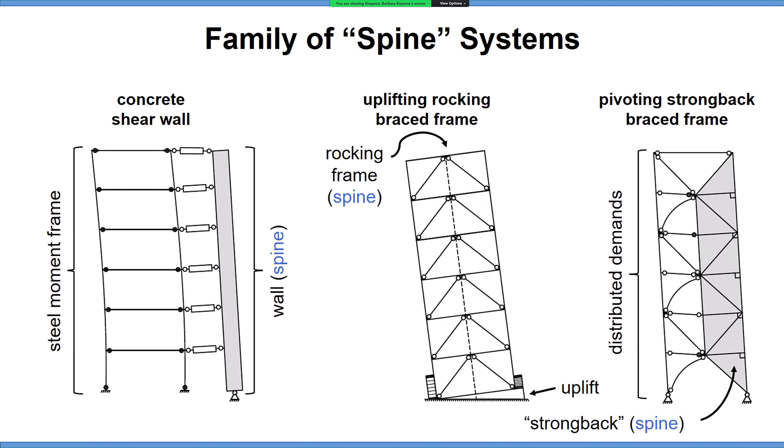From that perspective, many of these systems have similar behavioral characteristics. I'm going to focus on the one on the right, but keep in mind it's really a family of these spine-like systems, and a number of researchers have looked at other variations of this concept.

When I initially was putting together this presentation, I thought it would be easiest to go through the many projects that have been funded so far, looking at this Strongback spine concept. There's been a number of collaborators along the way, and I by no means want to focus just on the work that I've contributed to the system. I'm just going to put it in the broader context of the earthquake engineering community.

In 2013, there was a grant looking at the behavior of older or vintage brace frames, and that stemmed into the idea of this Strongback or spine concept. What we were seeing, and what has been documented after a number of previous seismic events, is that brace frames tend to concentrate damage in a few or single stories.

By doing that, you provide an explicit elastic load path where you can distribute the demands across multiple stories. So how I like to describe it is that in a conventional system, where you have concentrations of demand in a single story, it's really 100% of the damage in one story.

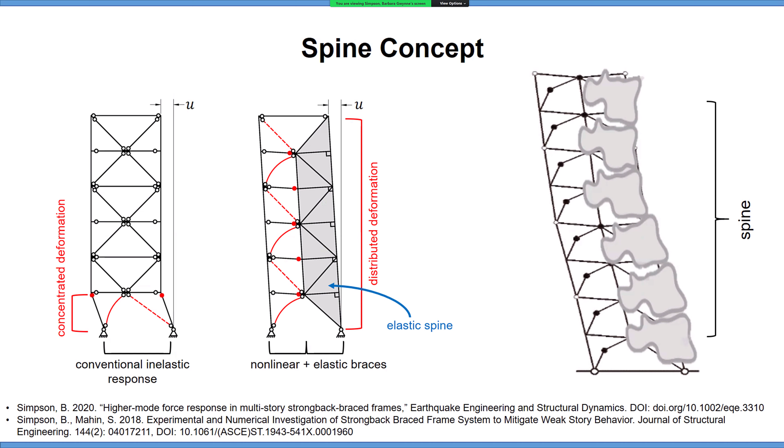This is another figure I often use: in employing one of these Strongback spines, you can vertically propagate demands, and because of that, you get increased design flexibility. So you can avoid mass irregularities and stiffness irregularities by spanning across those stories with the Strongback system.

If a brace were to fail—let's say by fracture or some rupture of the steel core of a buckling restrained brace—you can still span across that story, provided you have a Strongback that's stiff and strong enough to remain elastic when that occurs. So it really does give the engineer more design flexibility.

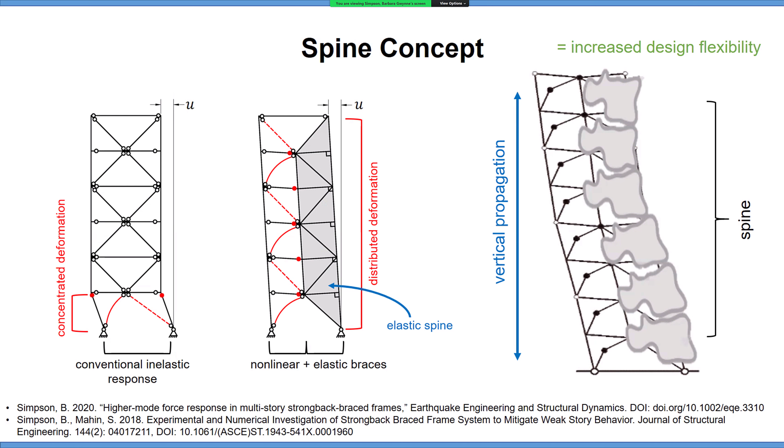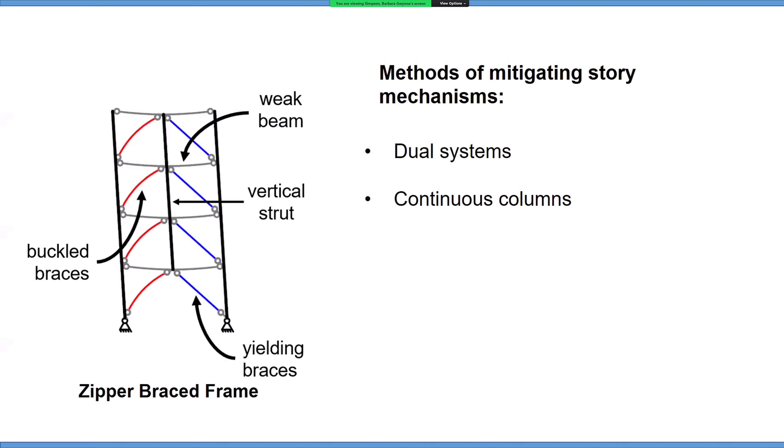I already mentioned the shear wall concept, rocking and self-centering systems, and again the zipper frame on the left. The Strongback is another variation of that theme, except that it's really the design of a very stiff and strong elastic steel truss that's embedded.

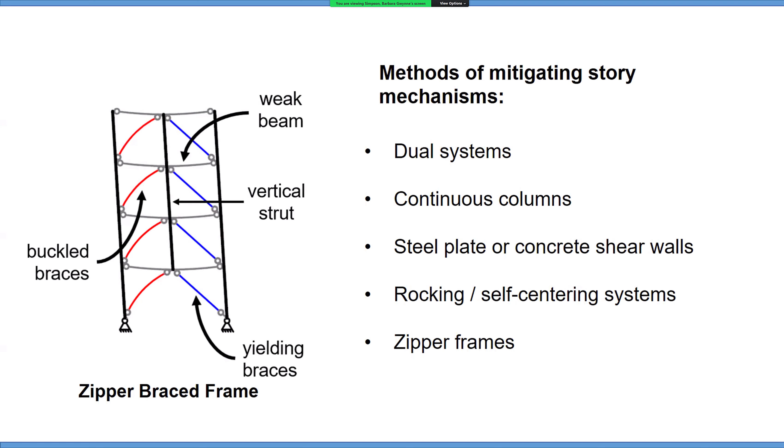Typically it's shown within the same bay as your brace frame system, but it could also be in an adjacent bay, or even separate out entirely. What it does, by having an elastic portion of your system that's designed to remain elastic, is that when you start looking at the kinematic or plastic mechanism of having that elastic portion...

...you get this pivoting type response, where a portion of this triangular part of the system, which is designed to remain elastic, pivots back and forth about a pinned base, or we've also looked at a weak axis column base.

This was one of the first experiments that I did on the system. It was a 2-story brace frame with a buckling restrained brace as the primary energy dissipating mechanism, and then it used the beam with flexural yielding as a secondary energy dissipation mechanism.

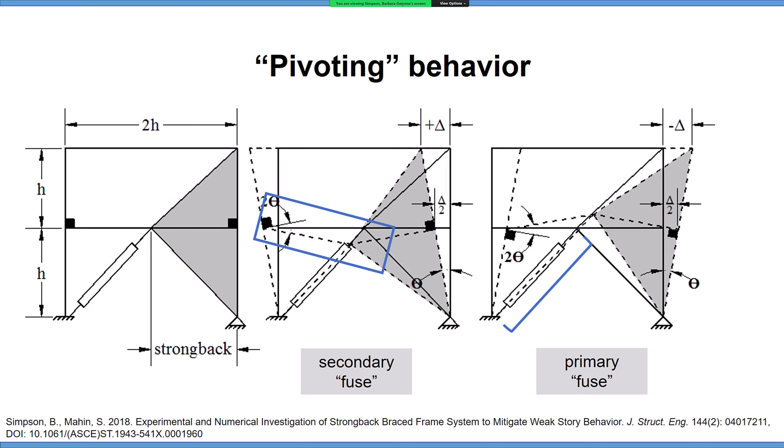This was the experimental test that I conducted during my PhD, and here you can see the strongback portion of the system that was designed to remain elastic. This was the experiment, and we pretty much got that behavior, that pivoting back and forth behavior.

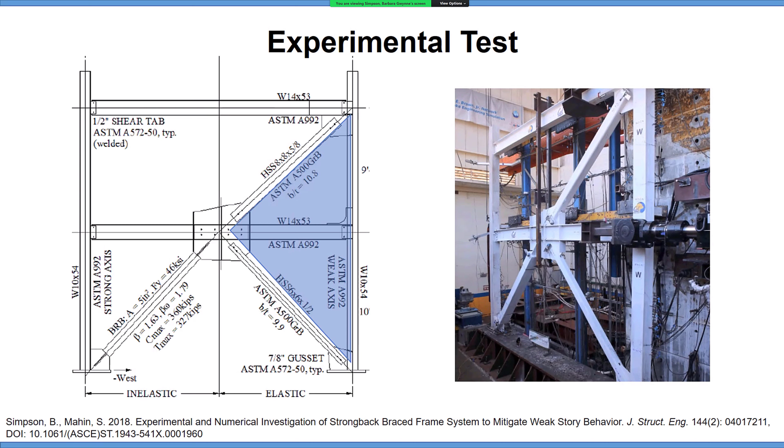Now the issue with this experiment is that it really didn't look at the dynamic response, and I'll have a couple slides just on how the dynamic response is very different than what you're seeing in this experiment, as well as that figure of the plastic mechanism.

This idea started catching on, and it was funded by AISC back in 2017, and it'll be funded again by AISC starting next year in 2022 to look at the system and how it can be incorporated into AISC's seismic design guidelines.

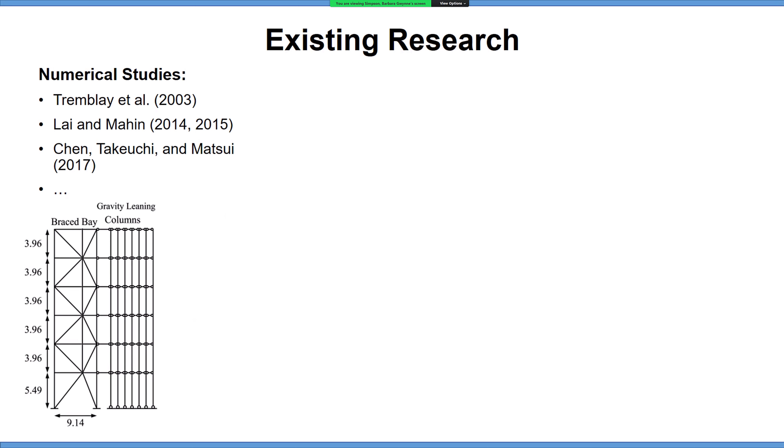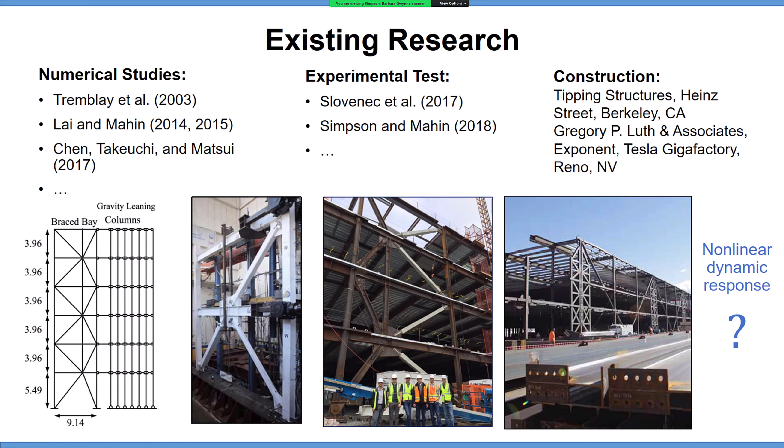The idea initially when it was funded in 2017 was that there were a number of numerical studies, this experimental test, as well as some work done by others, and it was started to be implemented as this very stiff and strong elastic truss in practice. But there wasn't really an idea of what this nonlinear dynamic response of these systems might look like and how you would adequately proportion this strongback truss to remain elastic. So this project sought to understand that a little bit better.

Here you have a first mode response where the force resultant of whatever those inertial loads are is maybe at this height h hat. You're forming some sort of plastic hinge at the base, I'm just calling that M1 star. And then just by equilibrium, if you take about the base, you can say that the base shear by some sort of capacity design is just going to be that moment divided by h hat.

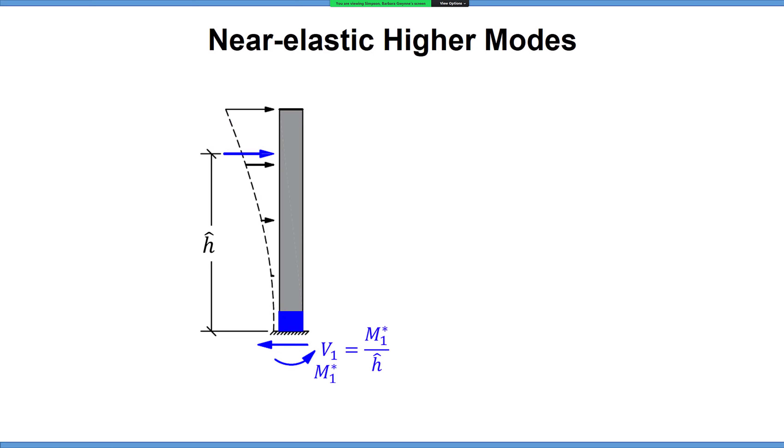Well, the issue is that's just accounting for the first mode of response. So as you account for higher modes, the force resultant wants to shift down. What you start seeing is that you're still constrained by the yielding at the base of the wall, so that's still M1 star in this case. But because now you're dividing by a smaller height of that force resultant, you can actually see larger base shears than you would just by the yield mechanism under the first mode.

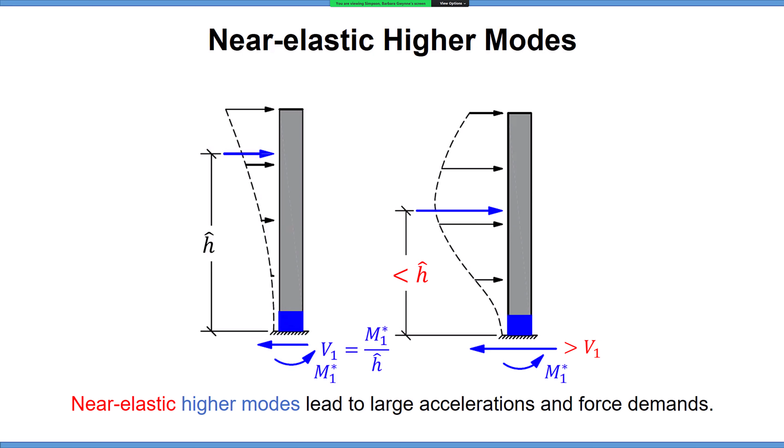I've been calling this the near elastic higher mode effect, and it can result in base shears, story shears, acceleration demands in the higher modes that are not necessarily limited by the yield mechanism of your system. Again, that's in the higher modes, not the first mode. So that results in some tricky design requirements to account for these higher mode force demands. And even worse, when you start looking at the higher modes, it's very ground motion dependent.

So now you're looking at what I'm calling near elastic higher modes—they are near the elastic response spectrum, and so it is highly ground motion dependent. It's not like you're constrained by yielding in the system; now you're actually dealing with elastic or near elastic response, and so it's extremely ground motion dependent.

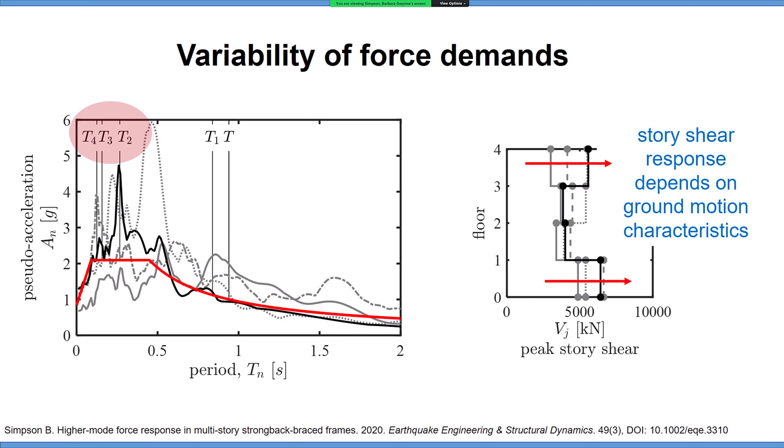So if you have ground motions that have higher mode frequency content, it's going to result in larger forces. And if you have ground motions with lower frequency content near your higher modes, it won't necessarily show this higher mode effect. But it is important, and it's something we need to design for in order for that strongback to remain strong enough and be a reliable system.

There's a number of different ways that people have sought to characterize this effect. I've looked at employing a modal pushover analysis, and the paper I wrote on that has been sent out. I can talk about that more if anybody's interested. It basically combines the response in multiple modes, though I should say it's not exactly theoretically accurate, so I can talk about that further too.

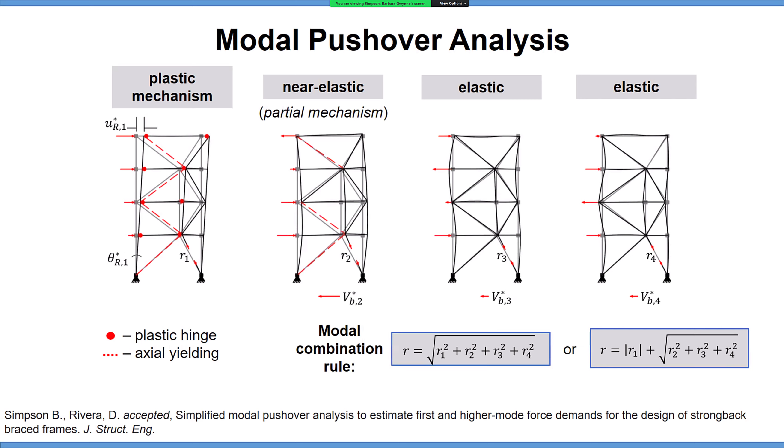There's also been a number of researchers who have proposed this modified response spectrum analysis, where you use a truncated response spectrum representing an elastic response spectrum in the higher modes, but then you reduce by 2/3 to get the design earthquake, and reduce by R to account for inelastic response in that first mode. So you could think of it as using an R equals 8 for a BRBF system in the first mode, and maybe an R equals 1 in the higher modes.

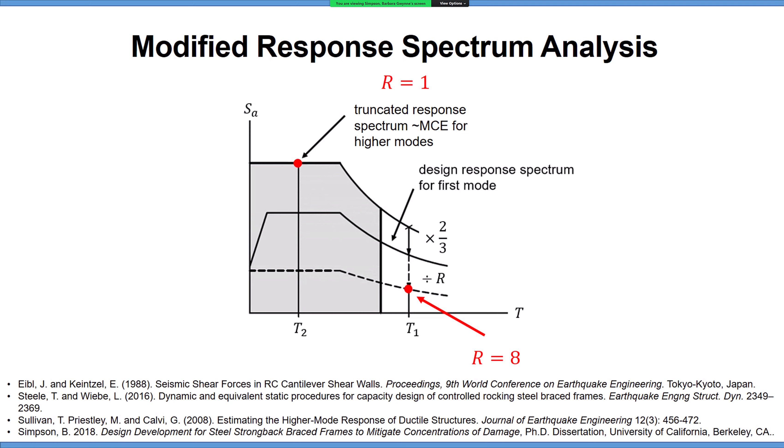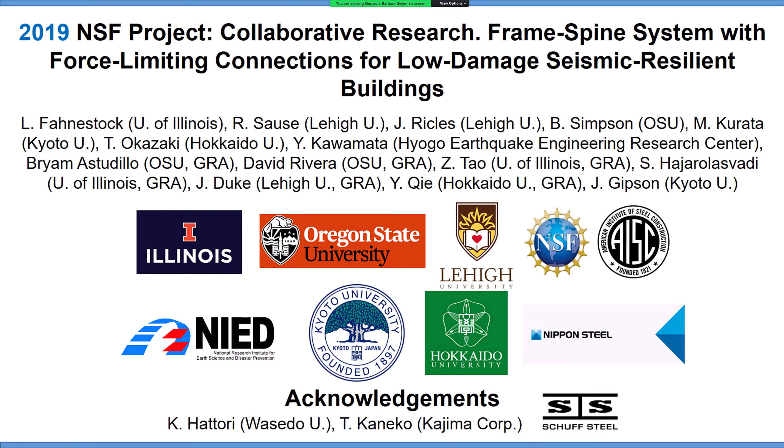And so that idea—this will be the last few slides that I have here—led to this most recent research activity, which was how do you address these higher mode force demands and the acceleration demands.

This was a project where we looked at a number of different ways researchers have sought to mitigate these higher mode force demands, but this is just the one I happen to be involved with right now, where we're employing what we're calling force limiting connections.

These are connections that yield, sandwiched between whatever your spine is and whatever your base frame system is. It gives you some controlled yielding so you can control those higher modes so they're not basically in the elastic range of the response spectrum.

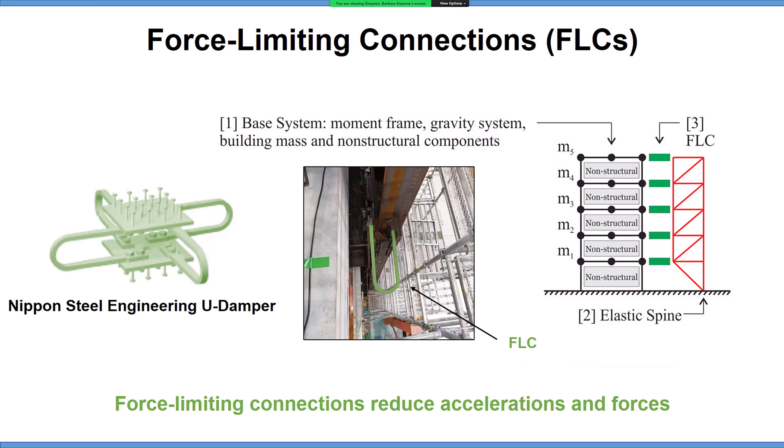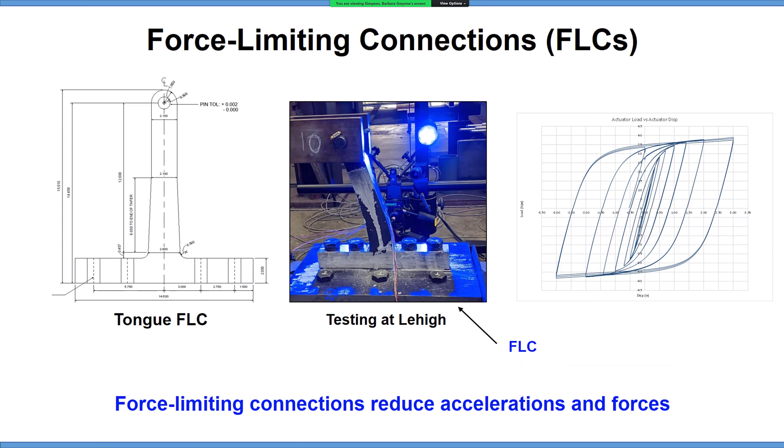Here is one of the force limiting connections, or FLCs, that we looked at, which was this U damper, and then we also looked at a tongue damper. The characteristics of these dampers are fairly specific—they have pretty high post-yield plateaus, so low stiffness after yielding. There were a number of design considerations we're still trying to figure out for these force limiting connections.

We actually tested this at E-Defense, which right now is the largest shake table in the world. You can see the U dampers here. In this case, we're not using a truss as a spine—we're actually using a very deep column, just because we don't really have a lot of mass associated with the system.

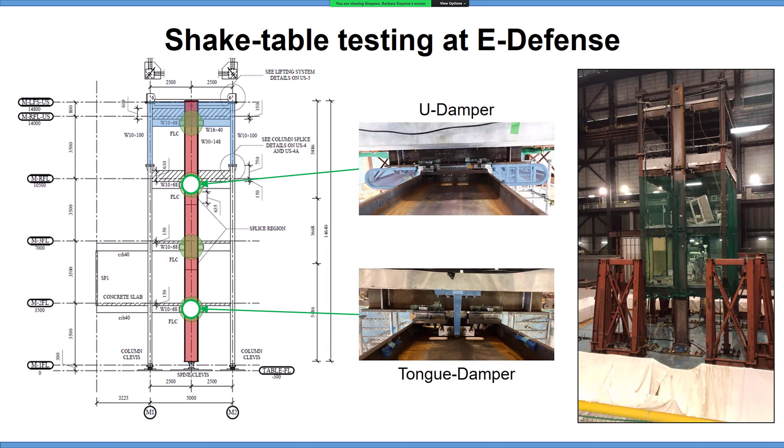It's only a 4-story frame. It is at full scale, but it's not exact—it was fairly small compared to a realistic building, for example.

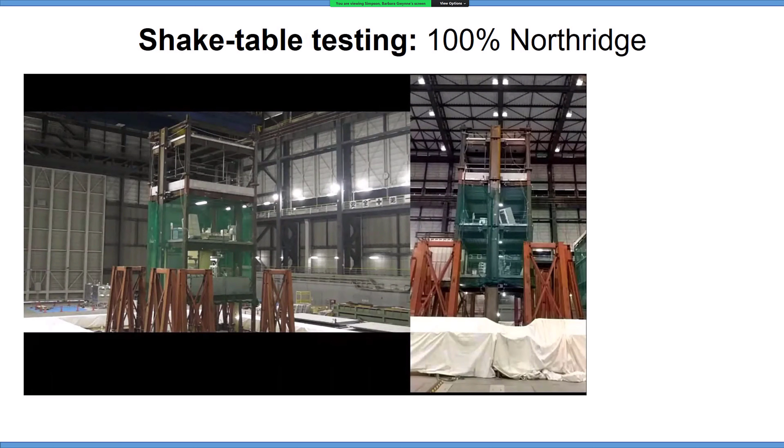We tested it under a number of different ground motions and looked at those ground motion characteristics. When the force limiting connections weren't engaged and we locked them, we actually saw quite a bit of non-structural damage due to hospital equipment. In this case, we were really looking at hospital type buildings and the equipment associated with that.

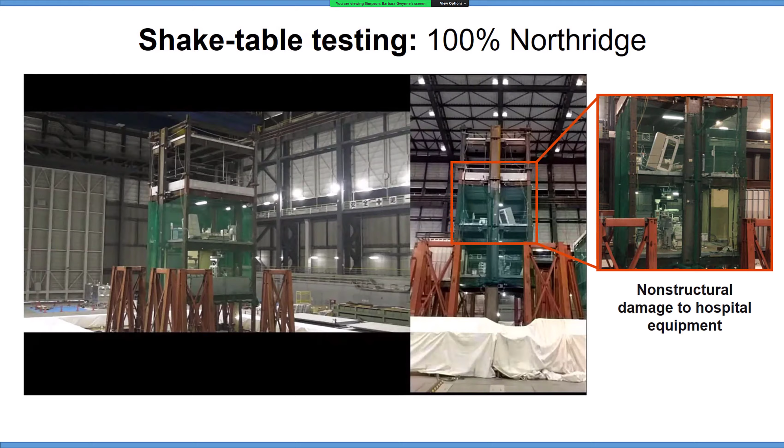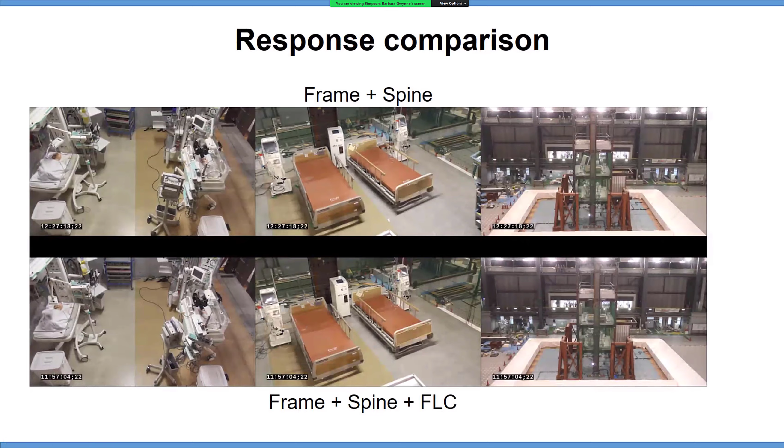You can see here—this top series of videos is just the frame and the spine, and this second series of videos is the frame, the spine, and then the force limiting connections. You can really see the difference in the accelerations. Look at the top series of videos, and you'll see you get quite a bit more motion, and that's due to those near-elastic higher mode effects.

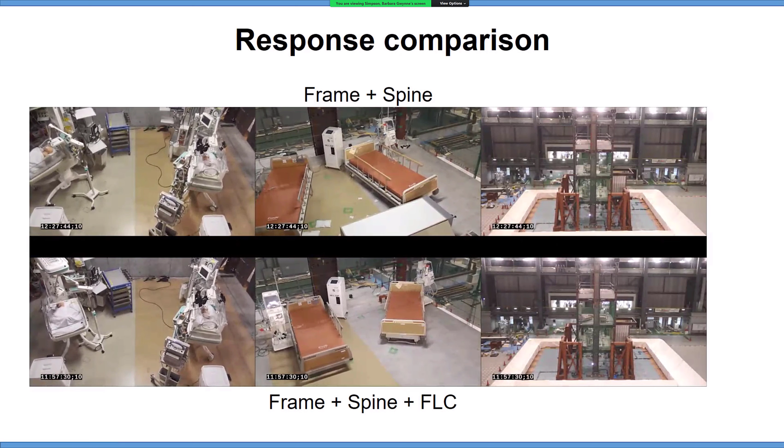This is again under the same ground motion, but I want to be clear this is very ground motion specific—you have to have a ground motion with content near your higher modes to get these sorts of effects. There's a number of other methods to mitigate these higher modes as you design these Strongback systems. There's also been a lot more recent work I've been involved with, extending this concept to other materials, mainly mass timber, and I could talk about that more if anyone's interested.

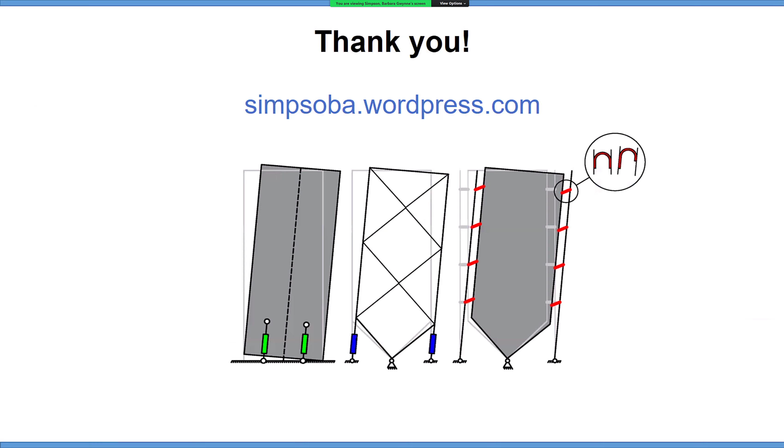For me, it's really the design flexibility—and I think Leo really hit it on the head—that when you're looking at drift, you can really control it by employing this elastic element. It's basically a mega column in your system, and it gives you a lot of different variations on that general theme. That's just very exciting.

I mean, there's lots of things I'm theoretically excited about, but I don't know how much everyone on the call wants to hear about that.

So for me, the higher mode effects are also quite interesting just because it's so much different than a traditional seismic force resisting system. But in terms of design, it's really that design flexibility. It's kind of unmatched in that respect.

There's been a number of studies on this, and from my perspective, we've gotten a lot better at brace frames. We have compactness requirements for, in the case of an SCBF, the braces. Leo mentioned the fold lines. We have the strong beam requirement, which we can talk about whether that might be inducing more story mechanisms or not. So we've definitely improved, but there is a tendency for the system to form story mechanisms.

That's because when one of the braces in a story either yields, in the case of BRBF, or buckles, in the case of a concentrically braced frame, you're going to get a loss of stiffness associated with that. With the loss of stiffness, drifts are going to want to concentrate in that story where inelastic behavior was initialized. Unless you have pretty stiff columns that are able to provide a load path and distribute demands to the adjacent stories, you're going to continue to concentrate damage there. The drifts are just going to want to continue to go to that location.

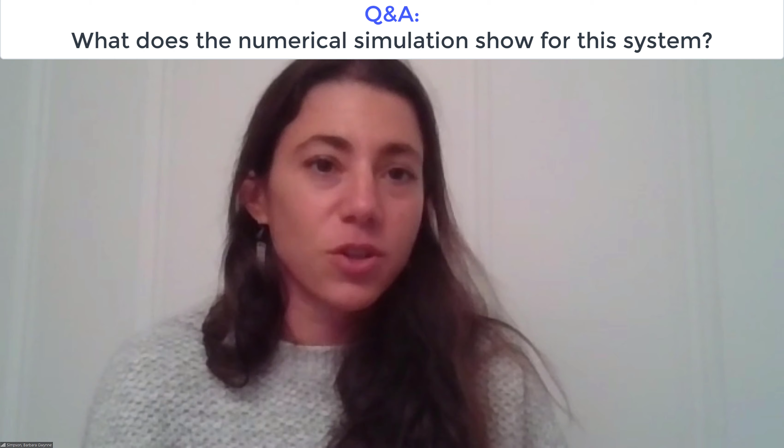But that's, I think, different than the classical Strongback I've been showing, where you design to remain elastic with ordinary details. You just have to ensure that it's strong enough, much like you'd ensure a column is strong enough for those probabilities. So you reduce that risk as much as possible.

There is inherent redundancy that's coming from other things, like the gravity framing, for example. So it's not like the Strongback is going to fail and then the entire system collapses. There's other redundancy that we often don't take into account in design, but when we do a collapse analysis, we would incorporate those other methods of load path.

Rather than focusing on the redundancy factor too much, there are other benefits of employing a Strongback—you could alleviate certain design requirements other than the system level design requirements. So for example, the use of ordinary detailing in the Strongback.

Potentially you have smaller strain levels in your buckling restrained braces. If you have smaller strains, your omega and beta factors are smaller. So you're dealing with perhaps smaller adjustment factors when you do capacity design for the BRBs. So there's things that come into play.

If you use it in a moment frame, for example, then strong column, weak beam requirements could be alleviated because now you have one, or a few, mega strong columns. So there are other design scenarios where you could alleviate some of these standard requirements and make the system more accessible.